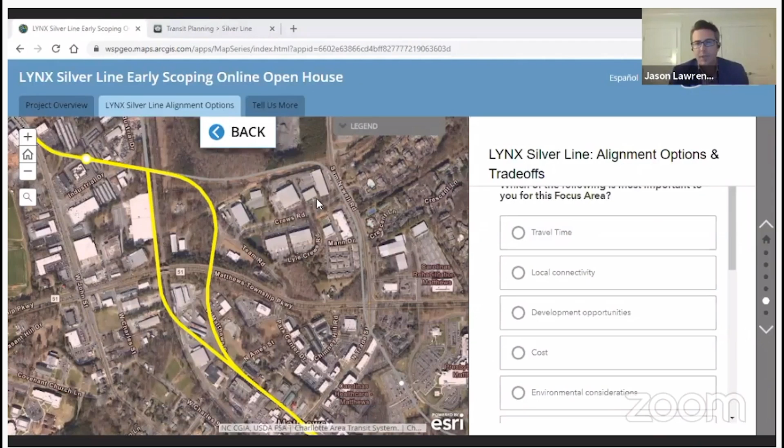Sure, thank you. I'll start this and then hand it off to Andy and Regina to fill in some gaps. The LYNX Silver Line rail trail study is looking at how to develop a trail program along the entire 26 miles. That means portions of the rail trail will sometimes parallel the project where possible. Other parts we will potentially run along sidewalks, multi-use paths, and other greenway and pedestrian projects along the corridor. It'll be a mixture of pedestrian projects along the whole 26 miles.

In the case of over 485, we're evaluating - we're just getting started with this effort. Design's a little bit ahead of us, and we're working with the design team to determine the best way to get across 485. Would it be with the bridge of the light rail? Will it be with the bridge of Independence Point Parkway? Is it included with that project? So we're looking at a couple of different options in that area.

Andy, I don't know if you want to add to that. Yeah, the only thing to add is that at this point we intend to be on a separate, independent bridge from the Independence Point Parkway. They're just not moving forward at the same time to take advantage of that, so it's likely to be a separate bridge, and there's a couple different ways we can provide that access. I feel pretty confident there will be premium pedestrian access across 485 on one of the bridges. We just have to get into the details and figure out the best way to get it done.

Thank you, guys. We have a question: is this going to affect the Fox Ridge Cedar Glen area? And this might tie into any type of property impacts. We have quite a few questions about what property impacts and relocation for residential look like, if you want to touch on that topic.

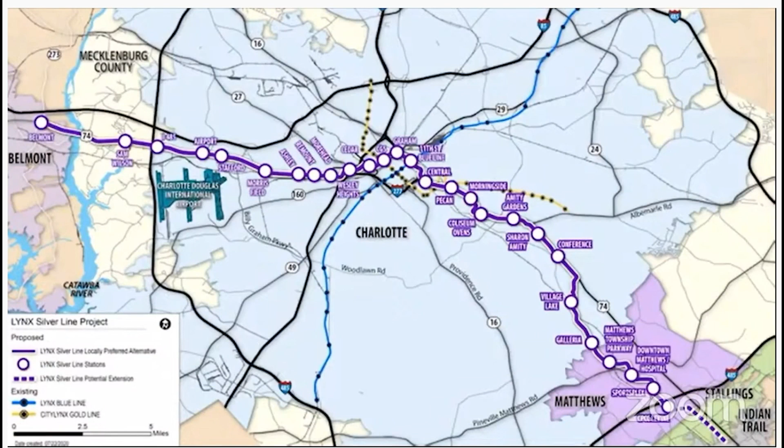Now that you've met the team, let's talk about the actual Lynx Silverline Light Rail project. The Lynx Silverline is a proposed 26-mile light rail project from the city of Belmont through Center City, Charlotte, and the town of Matthews, with a potential extension into Union County.

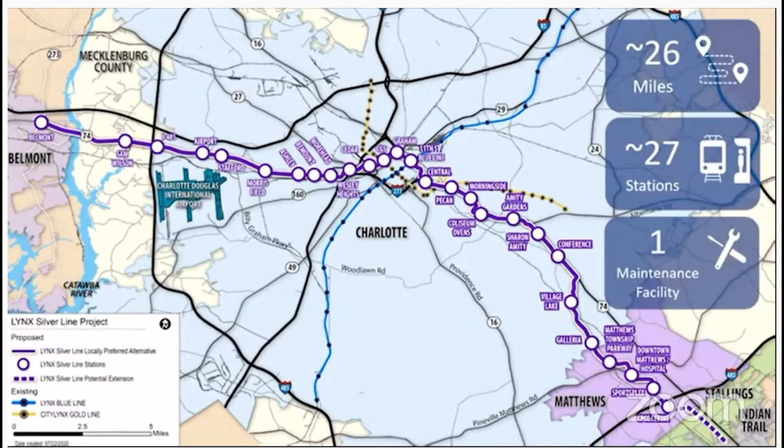We are growing as a region, and coordination is key. Throughout the project, we will coordinate efforts with several other programs, agencies, and projects. Currently, CATS and FTA are conducting early scoping. Essentially, this means we are seeking your feedback on the ongoing planning analysis to better define the project before entering project development in the National Environmental Policy Act, referred to as NEPA. Let's talk about how we got to this point.

Rapid transit has been discussed in Charlotte for decades. In 1998, the City of Charlotte prepared the 2025 Integrated Transit Land Use Plan, which proposed using rapid transit to support focusing future growth in Charlotte's key centers and corridors. The West Corridor along Wilkinson Boulevard and the Southeast Corridor along Independence Boulevard were two of the identified corridors. Additional planning efforts have occurred, and the plan is now referred to as the 2030 Transit System Plan.

In 2016, CATS completed the Southeast Corridor Transit Study, which considered various transit technologies and alignments. The study included a detailed technical evaluation and extensive public and stakeholder engagement. Our policy board, referred to as the Metropolitan Transit Commission, or MTC, adopted an LPA, short for Locally Preferred Alternative, for a light rail project in the 13-mile Southeast Corridor from Center City, Charlotte, to the Mecklenburg and Union County border.

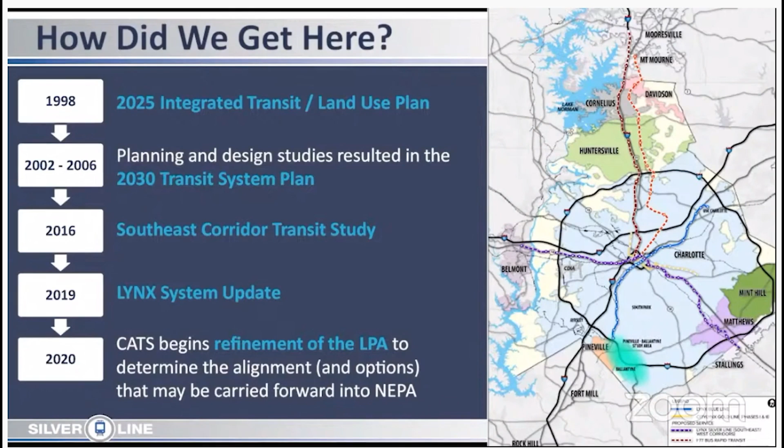Now we are assessing new opportunities and risks in order to refine the LPA and help determine the alignment and options that may be carried forward into environmental review under NEPA.

During the early scoping process, we start to develop the purpose and need statement, which is consistent with previously identified public and stakeholder goals. The purpose and need statement defines the fundamental reason why the project is being proposed, and it's the foundation for the environmental review process. The needs are the why the proposed action is needed, and the purpose is the what CATS intends to accomplish. The purpose and need will be refined during planning and through environmental review, with additional input from the public, stakeholders, and regulatory agencies.

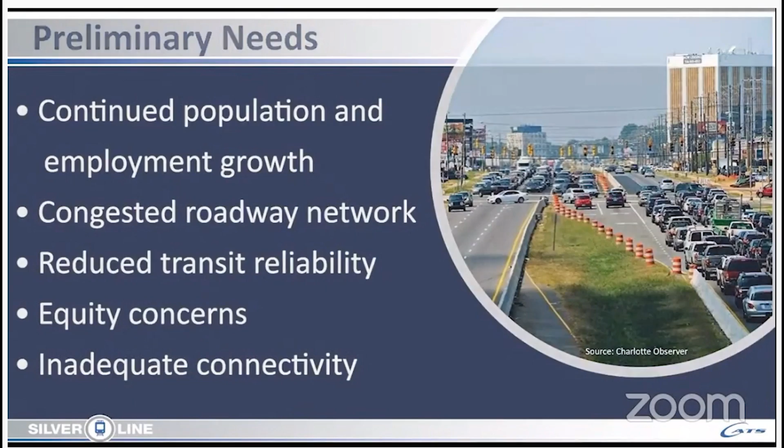This screen shows identified preliminary transportation needs in the Lynx Silverline corridor. The preliminary purpose of the Lynx Silverline project is to provide high-capacity transit service in dedicated right-of-way along identified roadways that address the desired transportation outcome shown on the screen. The full preliminary purpose and needs statement is available in the online open house. Let us know if you have any comments in the online survey, also available in the online open house.

You may be asking yourself, why are we refining the alignment if it was adopted by the MTC, the CATS Policy Board? Although some of the alignment was adopted in 2019, the Southeast Corridor was adopted in 2016. Just think about how much of our infrastructure changed in the region over the last 4 years. In that time, a lot of construction has occurred. We opened the Lynx Blue Line extension and have learned so much that we can bring to this project. Additionally, we will be conducting additional engineering and environmental evaluations to learn more about the corridor and continue asking for your input.

Now that you know why we are looking at refinements, let's talk about the decision-making process. We want to maximize the benefits of the proposed project while minimizing the risks. We're evaluating many factors as we refine the LPA, again, the locally preferred alternative, including public input, design constraints, environmental considerations, a quality rider experience, coordination with other projects, and land use surrounding the potential stations.

We have developed several alignment refinement options for your review. These options may enhance benefits or address risks associated with the LPA. However, the alignment options also have their own pros and cons, as described in the interactive comment map on the online open house.

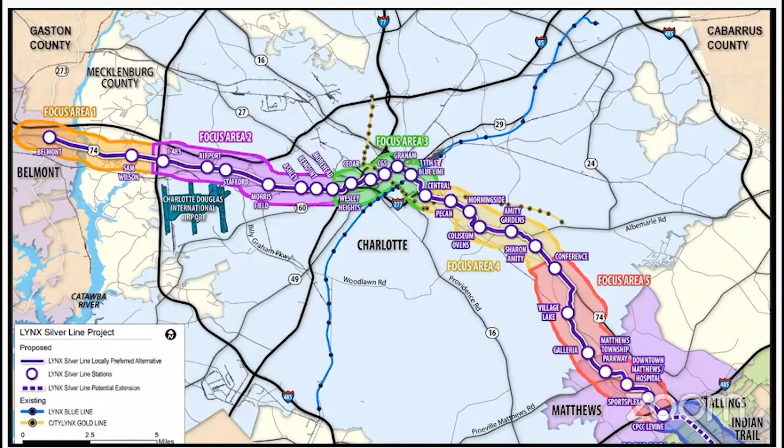You can get more detailed information about the alignment options within each focus area by using the interactive comment map in the online open house. There are short videos that describe pros and cons of the alignment options for each focus area. Please review the videos at your convenience, available on the online open house from August 31st to October 14th.

Once you review all the information, let us know what you think. There are a number of ways you can provide your input. Browse around the online open house to learn more about the project. Leave comments on the interactive comment map and take the public survey.

We're hosting live virtual public meetings on September 15th, 16th, 17th, 22nd, 24th, and 29th at 5:30 p.m. Each of these meetings will include this general project overview, plus a more detailed discussion on one of the focus areas. Check the project website,

ridetransit.org/lynxsilverline, to learn more about how you can access the meetings and the focus areas that will be featured in each one. Additionally, you can request a virtual meeting with our team for your business or neighborhood group by contacting us via email at

linksilverline@publicinput.com, or the CATS customer service via phone at 704-336-RIDE, that's 704-336-7433. If you prefer to submit a hard copy of your comments, you can send a letter to CATS, care of Ajanel Poole, at 600 East 4th Street, Charlotte, North Carolina, 28202. Public comments must be submitted by October 14th, as we will conclude the early scoping period.

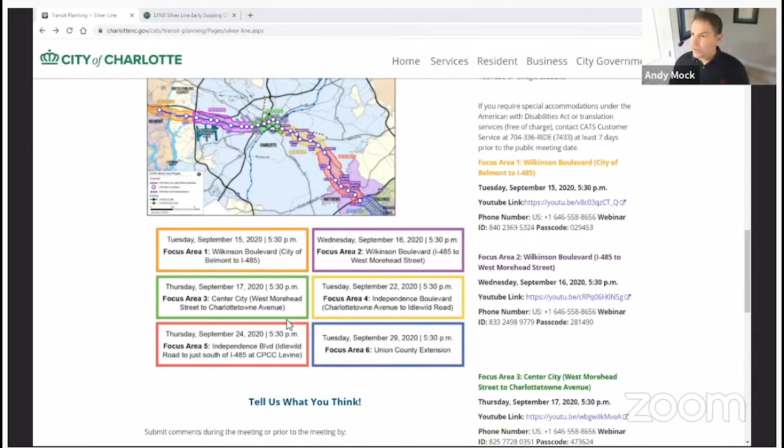So if you're interested in hearing about downtown Matthews or somewhere else, you would just come here and look for that area, and that would be focus area 5, for example, and you would tune in to the links over to your right on September 24th at 5:30. So that's just some general high-level overview of that.

If you want to get into the main tool, which I'm going to go over next, go to this online open house tab, right here. And that will take you to our story map, or the online open house. There are 3 tabs to this, and I'm going to spend a little time walking through this because this is the main tool that we're using to collect public feedback and engagement on our alignments that we have right now.

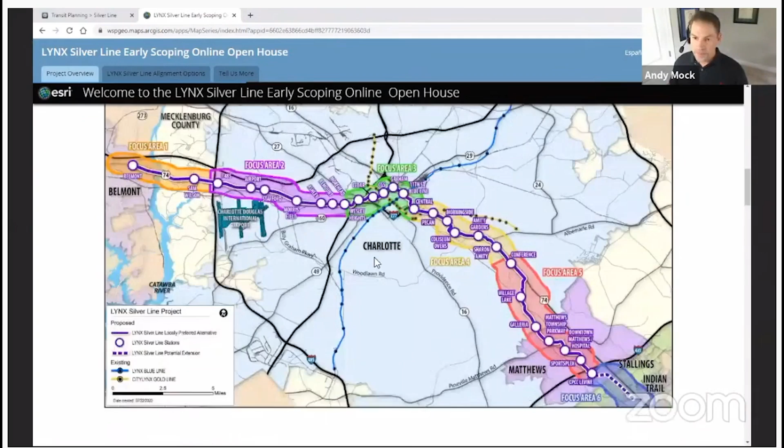So tab 1 is the landing page for that. There's a welcome video, saying where we are, from our CEO John Lewis and myself, talking about the public engagement process. Again, some more high-level language about what the Silver Line is, a nice clear map showing the Silver Line and the focus areas, and the period of time in which we're collecting early feedback as part of early scoping, which began on August 31st and concludes on October 14th.

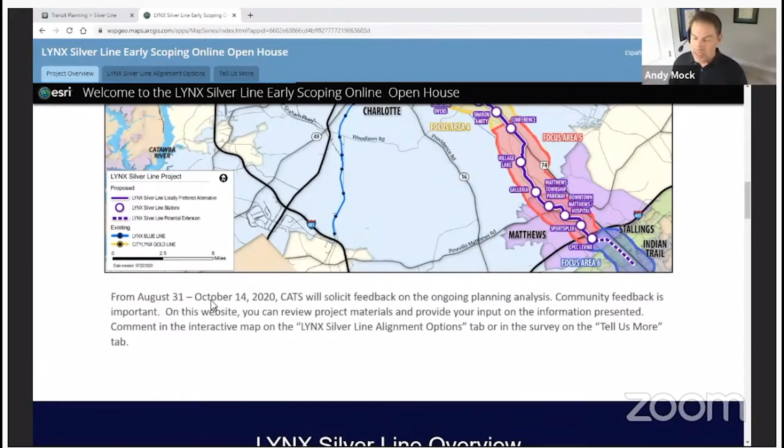If you'd like to watch that same video again to refresh your memory, that's also on this website, on this tab right here, with also some history, a nice timeline showing the predecessor studies that led from 1998 of the Integrated Transit Land Use Plan leading up to where we are today. This is a nice snapshot of how we got here, and also links to all the previous studies, so you can get into the details and read some of those to inform yourself.

Also, a little language about the preliminary purpose and need, that was part of the presentation, or the reasons why we're pursuing this project. Some description of the alternatives and the process we're going through, and also a little education about the environmental process and considerations as this project starts taking its first steps into the NEPA, or National Environmental Policy Act process. This shows all the things we'll be evaluating through that process for this project.

The project timeline shows where we are today and the early steps we're taking through the FTA process, with public engagement being a fundamental underpinning of that whole process.

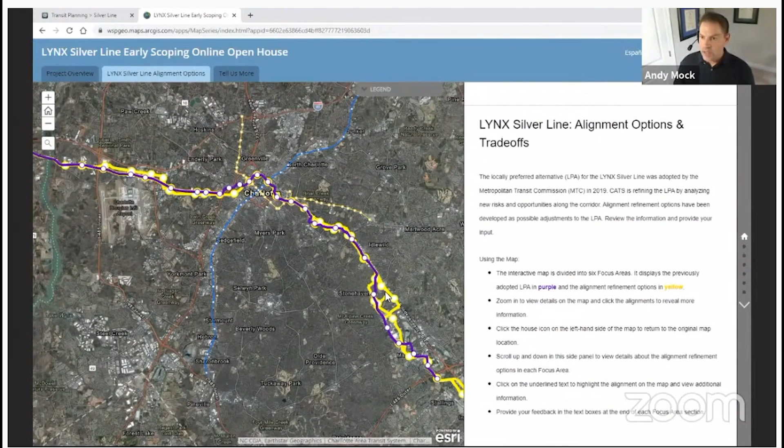What you're seeing here is a map, and I'll zoom out. The online virtual map you see is the entire corridor that goes from Belmont the whole way to Matthews and potentially over to Stallings and Indian Trail. The purple line, as I zoom in to the area we're talking about today, which is focus area 2.

This on the right side, this arrow and these dots, are the best way to navigate your way around this map without panning forever. You can click the down buttons and it will walk you through each focus area.

One thing to note is that the locally preferred alternative always shows up in purple. The locally preferred alternative was adopted in February of 2019 by the Metropolitan Transit Commission. It's the starting place for our evaluation going through this process.

However, in our early review of the locally preferred alternative, we identified some risks and uncertainties that we thought made sense to evaluate other alternatives and options to see if that mitigated or improved the alignment over the locally preferred alternative. Also, there were certain situations where something came up that the locally preferred alternative did not account for, such as some of the airport's development area, which was less clear at the time of the LPA than it is today. Because of that, we've also identified other design options, and all the design options show up in yellow.

Also going down the right side of the page, you'll see a bullet list. If you click on the bullet list, the map will zoom into that area and provide a simplified pros and cons to help the public understand the benefits of each particular alignment or the LPA, or the downside of it.

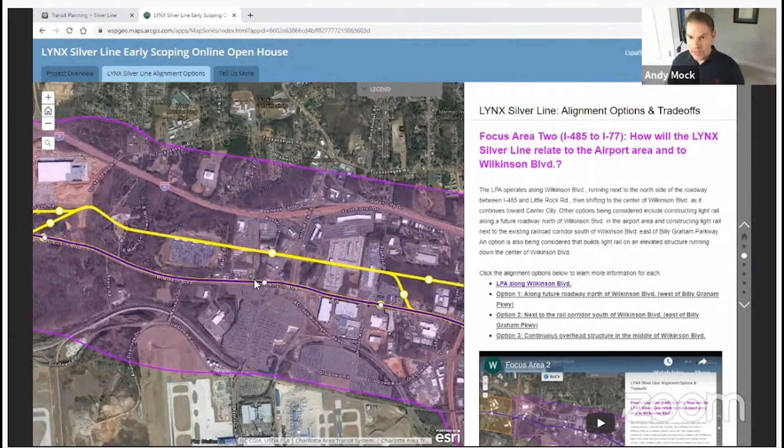So starting from the west, or from near I-485 towards Center City, the locally preferred alternative, or the LPA, which is the purple line again, is on the northern side of Wilkinson Boulevard, on the curb side. That would mean the light rail would be outside of the road on the northern side, behind the current curb, and traversing along the northern side past Little Rock Road with a station here. This was the station anticipated at the time of adoption to serve the airport.

And then somewhere near Harley, between Harley and Little Rock, the locally preferred alternative transitioned to the median of Wilkinson Boulevard, going under Billy Graham. The assumption from the locally preferred alternative is that it operated within the median of Wilkinson Boulevard, similar to North Tryon Street.

Following along the entire way past Morris Field and Old Steel Creek, Remount and Ashley, this would be incorporating light rail into the median of Wilkinson Boulevard the whole way from Josh Birmingham to Morehead, and then side running past there on the west.

So when you look at that at a high level, if you click the tab for the LPA along Wilkinson, the pros we've identified are that it's right there, close to businesses located along Wilkinson Boulevard, and close to the neighborhoods to the north. Having it in the median would provide premium access to those neighborhoods and to those businesses.

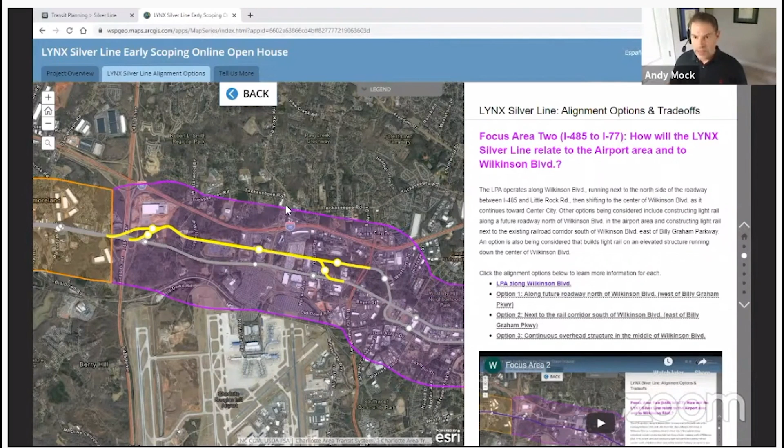The origin of this yellow line really came from some of the airport's planning, and we'll hear more about that later. The airport has initiated some master planning between I-485, Billy Graham, 85, and Wilkinson Boulevard, rethinking this entire area, and as part of that they believe light rail can help activate it.

So they proposed an alignment that deviates from Wilkinson Boulevard, coming along basically halfway between Wilkinson and 85, with a station near a future multimodal center, and also stations near I-485 and near Billy Graham.

So if we click that tab, the pro is that it minimizes the need to reconstruct Wilkinson Boulevard since we're off Wilkinson. It would be along a future potential road, but we could coordinate with the airport or whoever builds the road to minimize disruptions, and it connects and complements the airport's planned development area between Wilkinson and 85.

So we're part and parcel of a broader vision that light rail can support, and we think that's a good thing. The downside is it's a little further from businesses on Wilkinson Boulevard, so we're further away from some of the action there.

So moving towards Center City, remember the locally preferred alternative is in the median. We also identified an option that came off right after option one, ending right near Billy Graham Parkway, and then instead of following Wilkinson Boulevard, it goes behind the first layer of properties along Wilkinson, adjacent to Norfolk Southern, but not within the Norfolk Southern right-of-way.

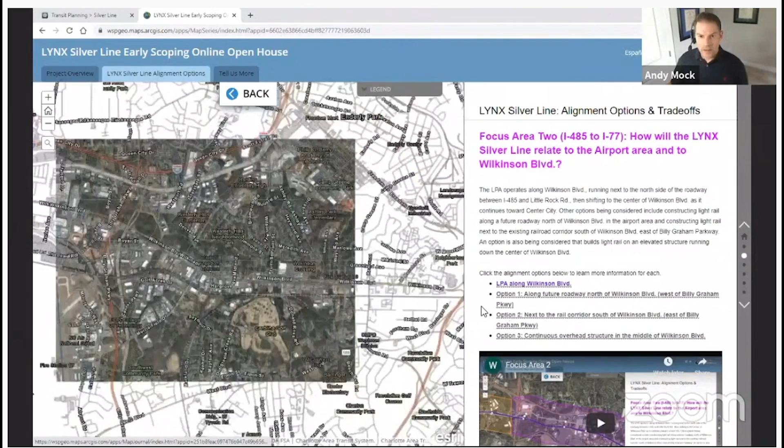The pros and cons of that: one of the biggest pros is it minimizes the need to reconstruct Wilkinson Boulevard, avoiding those real estate and construction impacts on the community. Also, because of the nature of the railroad, there aren't many cross streets or driveways, which means we can run trains faster and more reliably, benefiting overall operations and the system.

And there are opportunities for potential TOD, or transit-oriented development, between Wilkinson and West Boulevard. That's something our TOD team is looking at closely, to consider what the future of some of these areas might be, if different from the current uses.

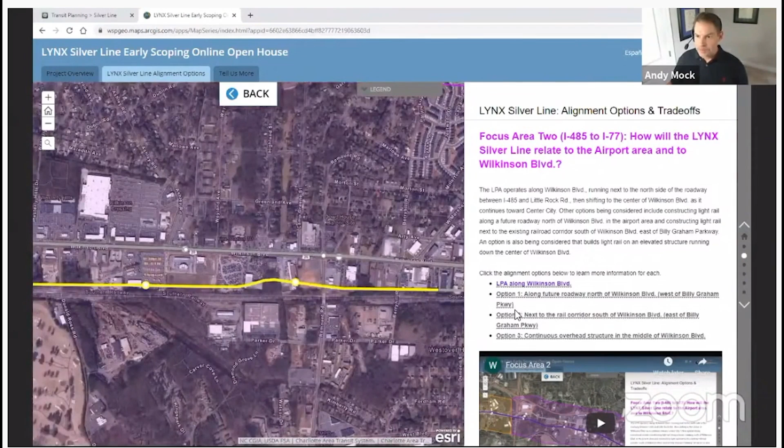However, one downside of this option is that because it's backed up against the railroad and not as close to the neighborhoods or that first layer of commercial businesses along Wilkinson Boulevard, it requires much more connectivity. There need to be more sidewalks, roads, and maybe bridges from the south side to the north so people can actually get to the station. Because if we build an alignment and stations that people can't get to, that doesn't make sense. So it requires more investment to make the stations work, and that's something we'd have to consider if we choose that alignment.

Option 3 has come up through some discussion and it's a different concept: building a continuous overhead structure. This would be an elevated structure with light rail that would go from Center City the whole way out to the airport. It would have faster, more reliable trains, because one benefit of an aerial guideway is that you'll have fewer cross streets, so the light rail can go very quickly.

It potentially reduces the amount of widening needed for Wilkinson Boulevard, because we'd be building the train above the road, allowing us to compress some of that construction and not need as much real estate to open the system, limiting the impact on adjacent businesses.

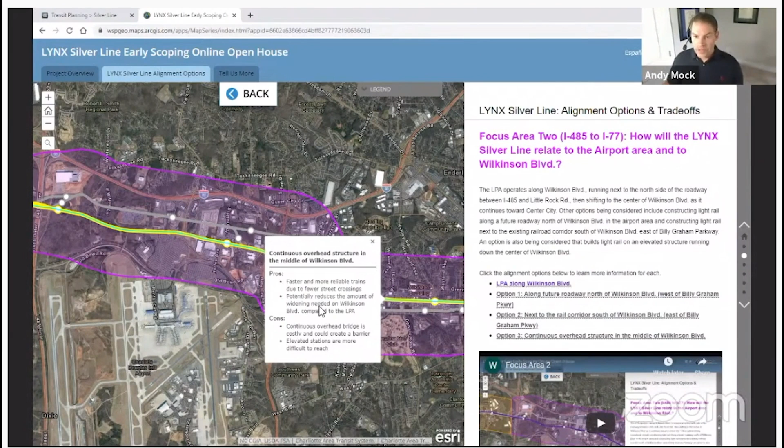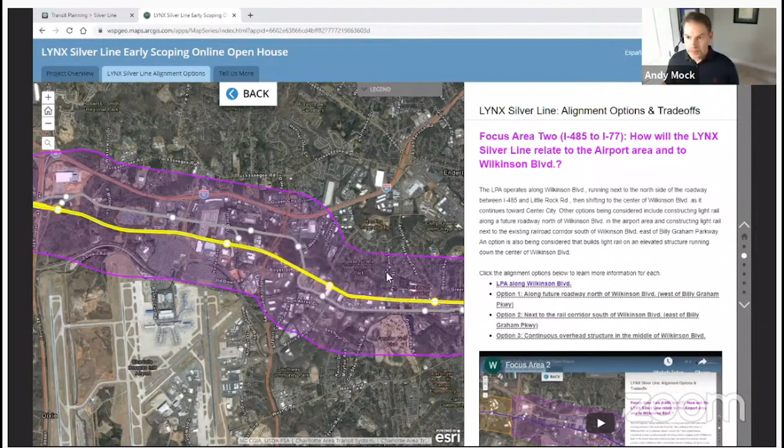However, the continuous overhead bridge will be costly, and it could create a visual barrier or an actual community barrier. And the elevated stations are more difficult to reach, so there are access concerns about how we can make sure our whole community can get to those stations.

If you're interested, we have another video that walks through this in a similar way, basically a voiced-over version of what I just went over. If you'd like to see that, it's available at this link.

There's also a comment form, and it's a very important process for us to receive your comment. We're asking for your comment on each specific area because your decisions may be different in different focus areas. So if you're interested in the entire alignment, that's great, but please fill out one for each comment area since your priorities may differ depending on where you are.

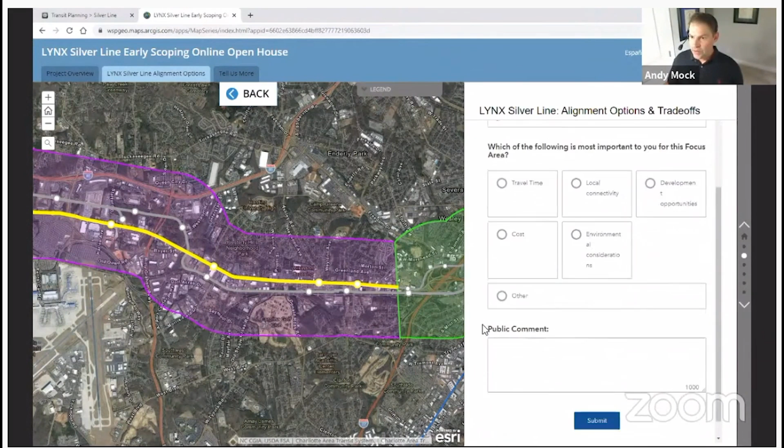Here's an overview of what those look like, with an opportunity to provide public comment. We have one of these modules set up for each of the 6 focus areas. I'm only going over focus area 2 tonight, so if you'd like to learn about focus area 3, please come back tomorrow.

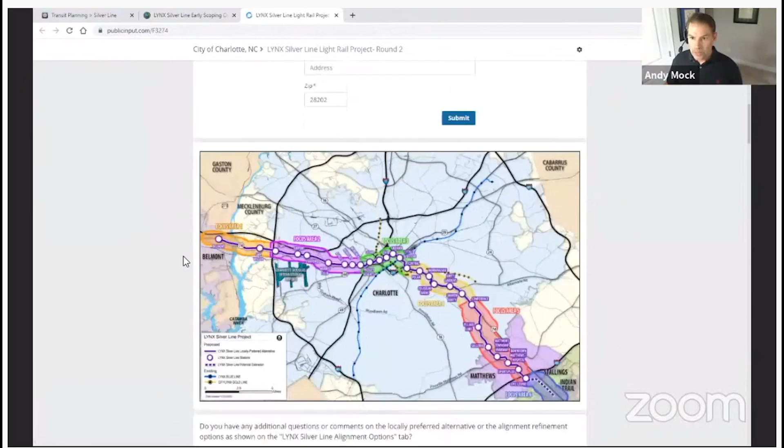Another thing to note is we have a third tab linking to a broader survey, so please take the time to fill it out if you can. It allows us to get more input and learn more about who's reviewing this information, and for you to share your thoughts so we have the benefit of that as we weigh the trade-offs of each option, because this really all boils down to trade-offs. I recommend reviewing all 3 tabs and filling out the survey—we would appreciate that.